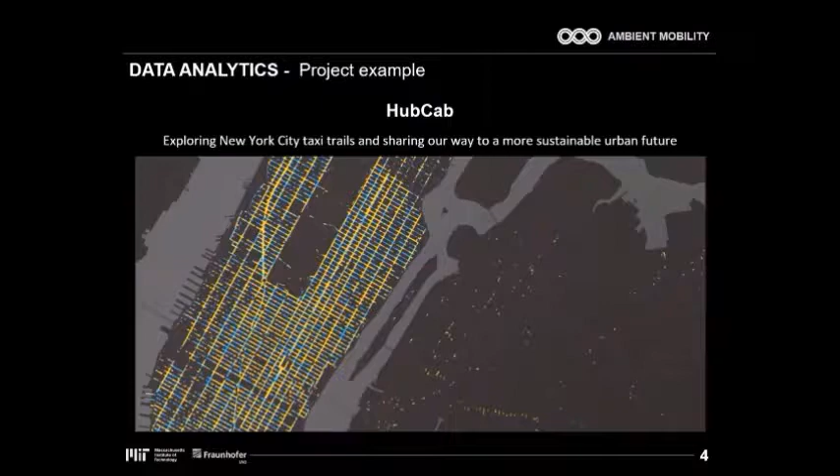What you can see here in yellow and blue are all the pickups and drop-offs in New York City by taxis, so by cabs, in yellow cabs in New York City. And as you can see, there are quite many of those.

These pickups and drop-offs are so dense that we had the idea to check what happens if not just one person is in each vehicle, but 2 share the same car. We just put some very practical boundaries around it: you do not want to lose more than 5 minutes, and you do not want to walk more than 500 meters. Then we checked what would be the potential, how many of those cabs could be shared.

And the percentage is quite stunning. Over 90% of cab rides can be shared just by pooling within an additional range of 5 minutes of travel time and 500 meters of walking.

If you do the math a little further, you can see that doing this, just putting not 1 but 2 persons in the same vehicle, can spare you 40%, even in practical terms. This is on real data, 100% of the cabs that is collected in New York. So you would only need 60% of the cabs.

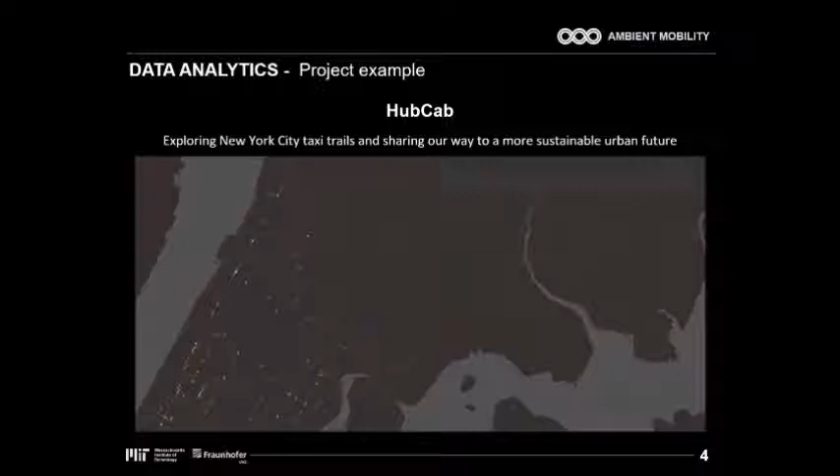Just astonishing numbers, which you can see if you go through some of the data. A more practical example, something that has happened in the real world: we have been part of the introduction of Car2Go in Stuttgart. It's the first, or still the biggest, electric vehicle free floating car sharing in the world. It started with about 500 electric smarts, and there we got a little more practical insights into what it is like to do free floating car sharing.

Free floating car sharing means that cars are not station bound. You can leave them anywhere in the operation zone, and pick them up and drop them off anywhere in the zone, so you don't have to bring them back to any stations.

What we learned throughout this process is that there's a lot of things evolving to be learned. For example, the vehicles move into the city in the morning and out of the city in the evening. So if you want to get a Car2Go in the evening in Stuttgart Center, for example, where I live, it's kind of hard because people drag them out to the outskirts of the city center when they go home in the evening.

We've also done some experimentation on how to access these vehicles. There have been Bluetooth tests with mobile phones. The whole system started with RFID cards, so you had your own card that you put in your pocket and just accessed it with a code. Currently, how Car2Go works is with an app, which is GPS based, and then you get access with your code. That's very convenient and has improved the system quite a lot.

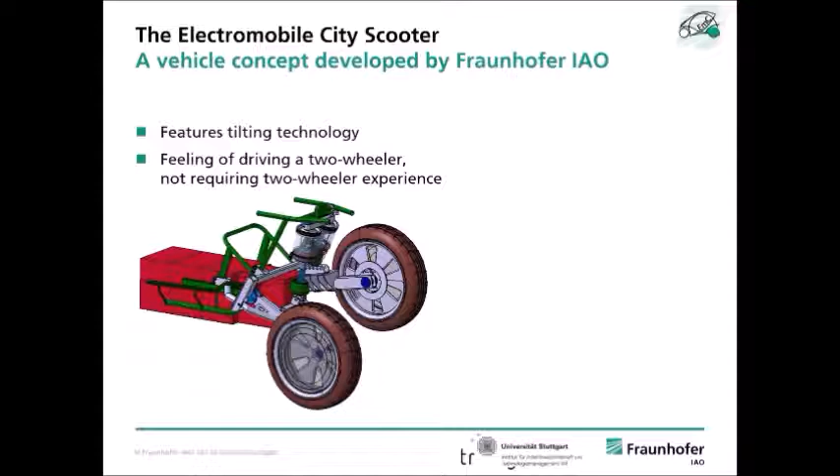If you're thinking as a city or as a company about introducing your own shared system when it comes to vehicle sharing, one of the dogmas that's been true for a long time, that you only use vehicles that are already there, is not true anymore. It's kind of simple, and there are lots of small companies that create new vehicle types.

This is one we built ourselves, the electromobile city scooter. It's a normal electric scooter, except we changed the back axis into a two-wheel axis, so that you can stand at any time and not fall over.

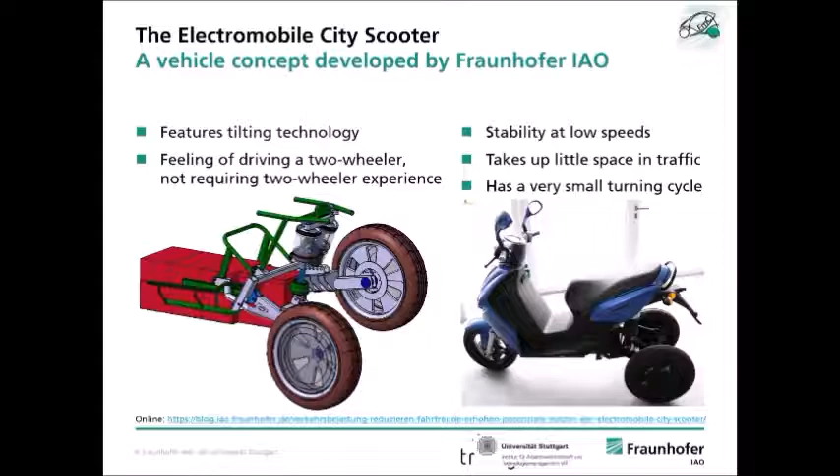So it's not only the big German, French, or Asian OEMs that provide vehicles for car sharing anymore. For example, Deutsche Post, the German National Post Service, is building their own electrical car sharing fleet, which they built specifically for their purpose, to deliver mail and packages. So they are actually one of the biggest electric car manufacturers in the world now. It's due to this technological change that there's a lot of new possibilities in the market.

I'll now hop over to the next megatrend, which is autonomous driving, and I want to show you an example of what we are currently working on. Let me start with this.

The technology with autonomous driving is quite far, it's quite advanced. There are still lots of legal challenges, lots of challenges in how to organize the system, priorities, legal issues, also social issues, psychological issues. But the technology itself is really quite advanced. You can get semi-automated driving pretty much in every high-class vehicle. The Mercedes-Benz S-Class, the Tesla itself had something called the autopilot, which isn't fully autonomous driving, but is getting very close. So the technology isn't really the thing.

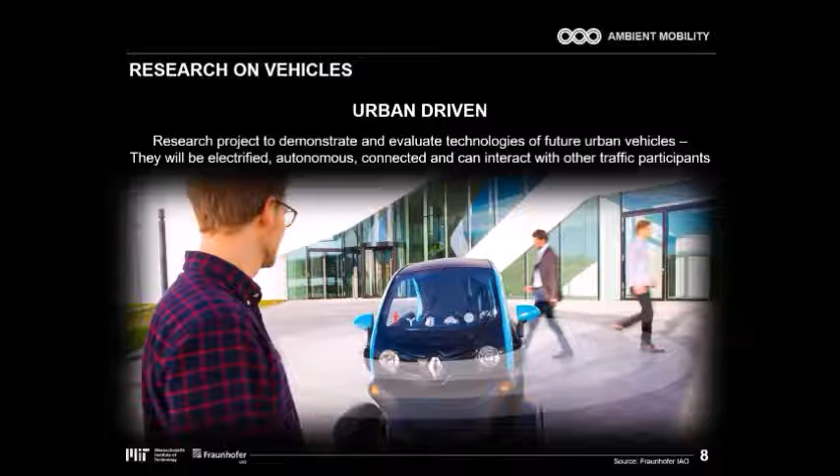But if you think of that system, it will be for quite a long time a mixed system of people driving and autonomous vehicles driving. There is this issue of vehicles communicating with persons. That's something we are experimenting with currently in a project called Urban Driven, so that people can communicate with the cars and the other way around, in an area that hasn't been researched too much in the meantime.

The funny part about this is that all the data this vehicle needs to communicate with persons, or also to recognize persons, the sensors needed are actually nothing more than an Xbox Kinect. The gaming console Xbox offers an array of sensors built into a tiny little thing called Kinect, and it's only €100, $100 actually. This data that the sensor gathers is actually enough to recognize people and to do the funny stuff of communicating.

Fun part also when it comes to autonomous vehicles is that when you do not spend the time in the vehicle driving anymore, you have lots more opportunities for what you could do and what you maybe would like to do. So we did a survey in 3 different countries: the USA, Germany, and Japan, to find out what people want to do when they are driving.

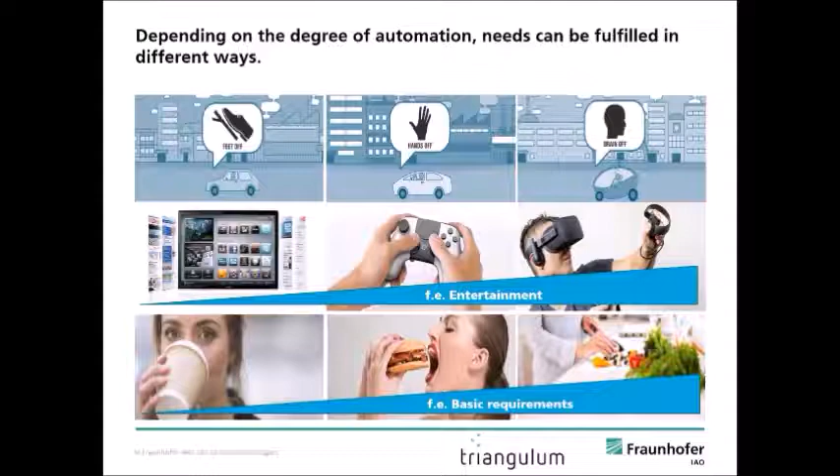So it's actually a congestion assistant. And then there's the third part: feet off, hands off, and then there is actually the brain off, where the car does everything by itself. So those are the 3 levels of automation we are talking about, and we checked which requirements, or what needs and services people want to have.

And I would like to ask you which one you think is most important for this sector. We of course hope that also for the business models behind it, that everyone who drives to work and drives home wants to be productive, wants to work. That's where we could create business models around employees paying for these services, but that's by far not true.

It's actually one of the most unimportant ones. By far the most important thing for people, what they would do when they wouldn't need to drive, is communicate—calling people, having Skype chats, just communicating, maybe inside the car—but working is really, really not important. The second most important one is entertainment, so if people have time in the car, they would love to be watching movies, playing video games. And that's true for all 3 countries we looked at: Japan, USA, and Germany.

Some more key findings of this survey. We asked if people are willing to pay for these additional services in cars, and one of the major things we learned is that 75% of users are willing to pay for these services. If you put this into an order of which nationalities would be willing to pay most, people from the United States are willing to pay the most, then people from Japan, but Germans are less used to, or less willing to pay in this area.

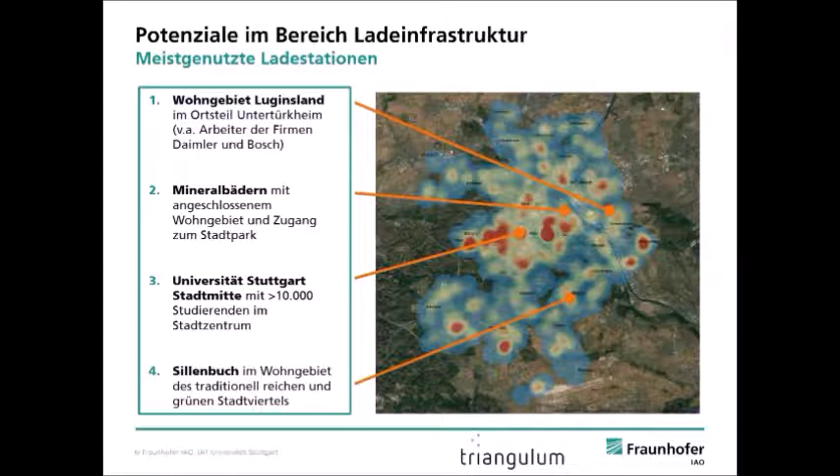When it comes to electric vehicles, charging on the car side is solved for quite a while, but the problems now occur a lot in the electricity network. In the area of Baden-Württemberg in the south, which is a more developed place in the world, there was a place where we couldn't place 3 charging stations next to each other because the medium voltage grid—not the local grid, but the medium voltage grid—could not offer the power needed. This is why there are concepts of smart grids, managing the peak demand a little better.

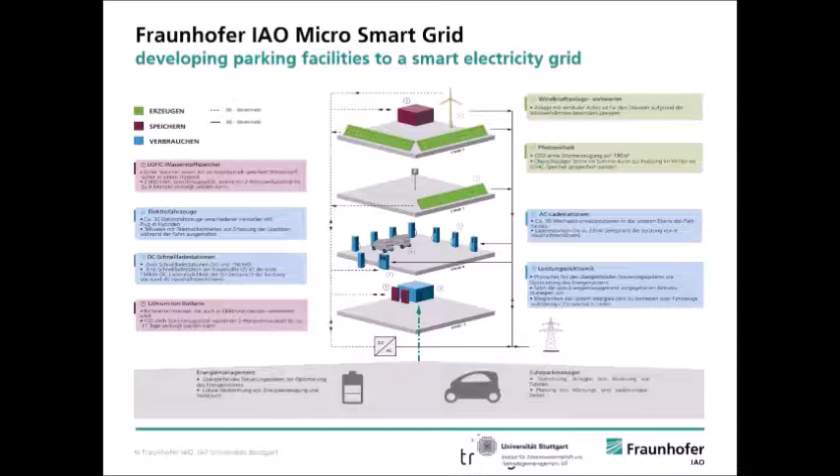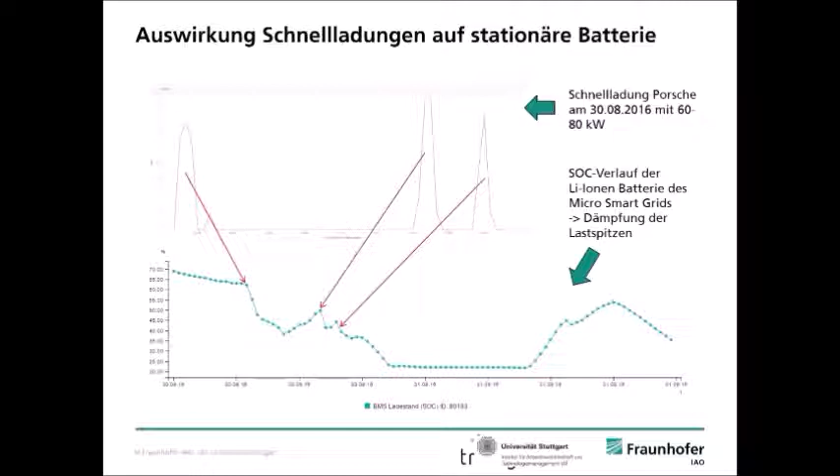If you understand that there are tests currently with 350 kilowatt vehicles, about 3 to 4 times this, you can imagine what that means to local grids. Also, when it comes to money, we pay 20% extra on our bill, I cannot tell you the exact amount, but it's quite substantial, just because of these peaks. In Germany, you have two parts to your energy bill: one is the kilowatt hour based one, and one is the power based, kilowatt based one.

Just a quick look into one of our ideas on how to solve this problem in a scattered way. This charge lounge also has a battery inside, so it needs a very, very low connection to the grid, and can still serve many different cars via battery in a very high power system.

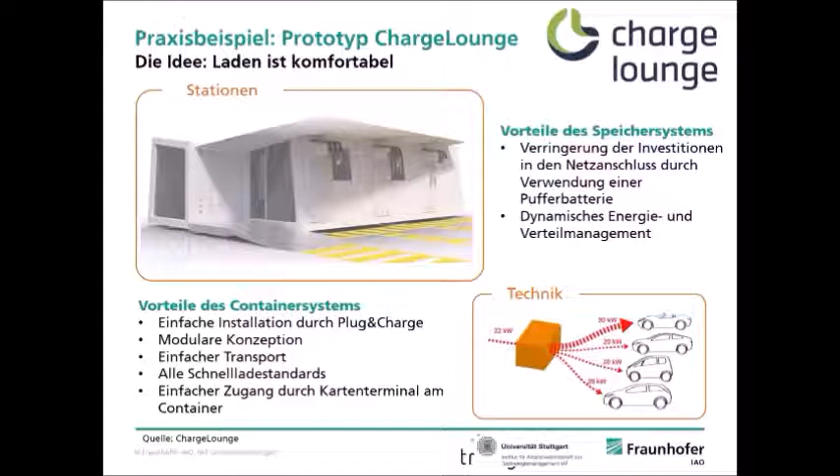As part of our cooperation in Triangulum, this one will very soon be in Eindhoven in Strijp-S with our partner Volker Wessels, who will then operate it over the next years. It will be presented at the Dutch Design event next year.

The whole concept is very flexible because when you're charging, you still have to wait a while. So we had one which we put at IKEA, and they have a sustainable living exhibition right behind these chargers, so that people, while charging, even outside of opening hours, can walk in and have a look at what IKEA does in the area of sustainable living.

The last part is connected mobility, which I'd like to talk about. The first thing that always comes to mind is one integrated card of services for public transport. I've been part of a project called the Stuttgart Service Card, very similar to what we know from other places, like the Octopus card in Hong Kong or London, an integrated travel card. This one was intended to do the same.

The interesting part is that technically it's really simple to integrate all the services, so to have a card that opens the car to use public transport, and also maybe for public services. The real problem, and why this system didn't really use all its potential, was that the stakeholders couldn't agree on terms for who owns which data and who is allowed to use which data. This is the main problem with these kinds of integrated systems: when you have a wide range of stakeholders, especially private ones included as well, it's really hard to distribute rights to the data.

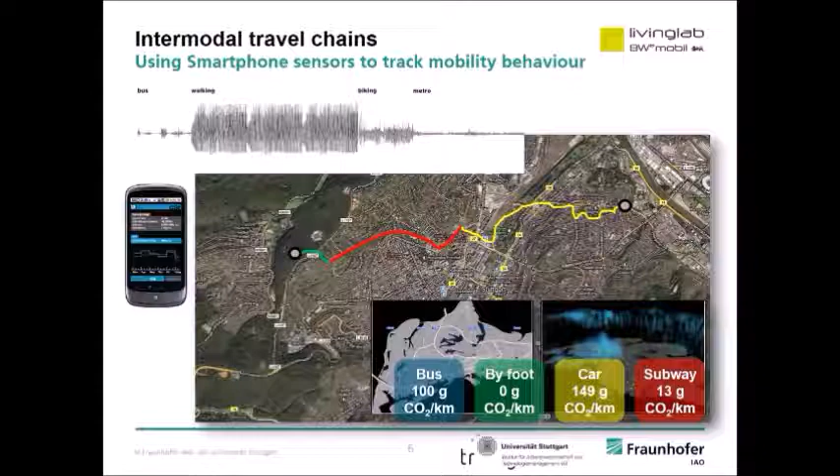So we tried to measure this, using sensors to measure the inconvenience with people, heart rates and how quickly they are moving, to receive a little more insight and maybe give people more information on how they are moving and how much CO2 they are emitting. So not only can you choose the fastest route, but you can choose the most convenient one, or the one that is most CO2 neutral, the most climate friendly.

So, a very quick look - that's my last point - into individual or connected mobility. We do not know too much about mobility. We have very, very few information on when, why, and how people are moving when it comes to the whole mobility system.

The information currently used most is survey data, a huge scale, very expensive service. We've done a comparison of which data are most suitable to do what, comparing 5 different kinds: surveys as the most used currently, automated traffic counts, so everything collected with sensors, including CCTV, and floating car data, data created with GPS accuracy inside vehicles - that can be cars, buses, or other public transport modes.

Then mobile GPS data, which is the stuff that, for example, Google and Waze collect - so GPS accurate data from your mobile phone - and mobile network data, the data collected in the mobile network. Whenever you log into a new cell, there's an event created in the backend of the cell phone provider, giving you the location of a person. It's not relatable to a specific individual, but it can give you information on how people travel. We used that data and checked how accurate it is and whether it can be used.

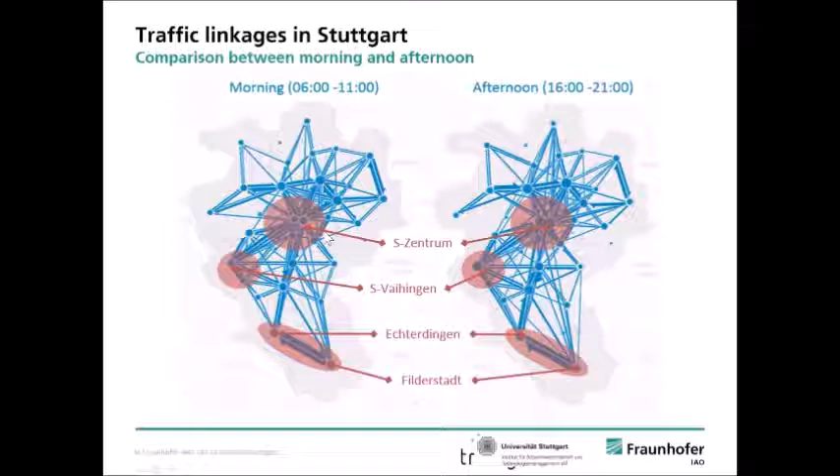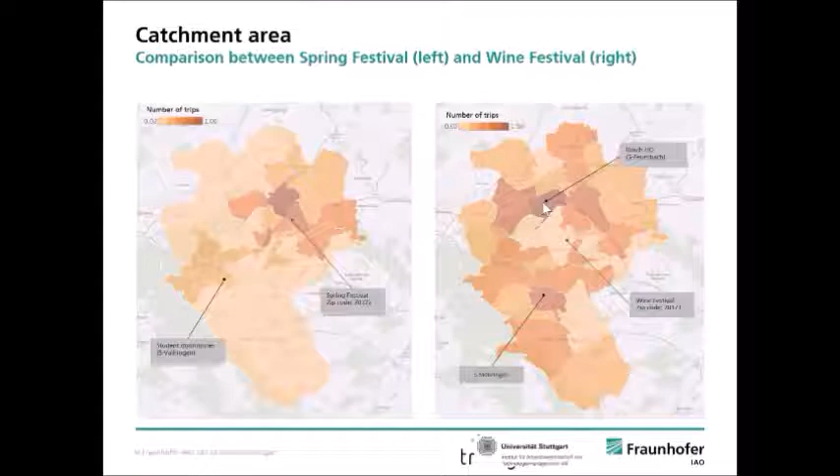There's another peak here in the southern part, where the student dormitories in Stuttgart are - also a huge flow into this festival. It looks completely different for the wine festival, which is a bit pricey. In the south are the areas where lawyers and doctors live, the more affluent area. We couldn't really understand this peak up here at first, but it's actually the Bosch headquarters - after they finish work, they walk down in a whole bunch into this wine festival to have wine together.

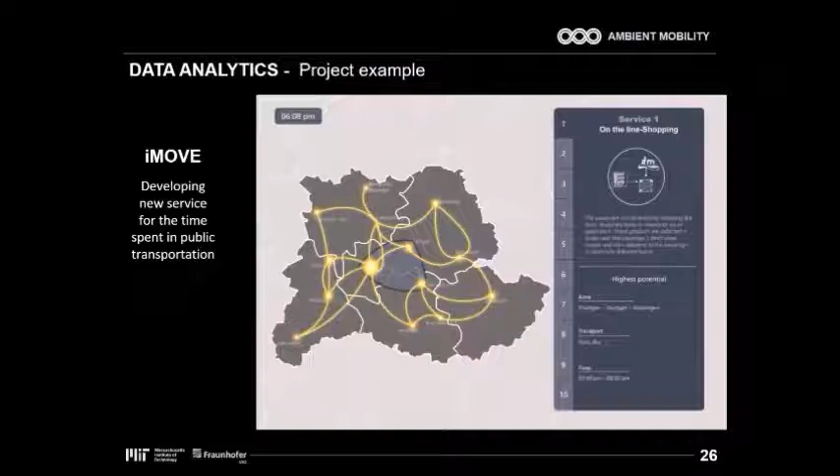I'll skip this one. With all this data, what you can actually do is also define new services and see their potential. We've done this in a different project called iMove that provides tailored services to people moving somewhere, using a completely different data set. But using this kind of data can also help define services for a customer group. This gives impulses for future scientific work.

As I've talked for quite a while, I don't want to go through them. It's just to show you that there is still lots of work to be done when it comes to new mobility modes and new innovations in mobility. So whoever wants to join us at any time with answers to any of these questions, we're really happy to do this.

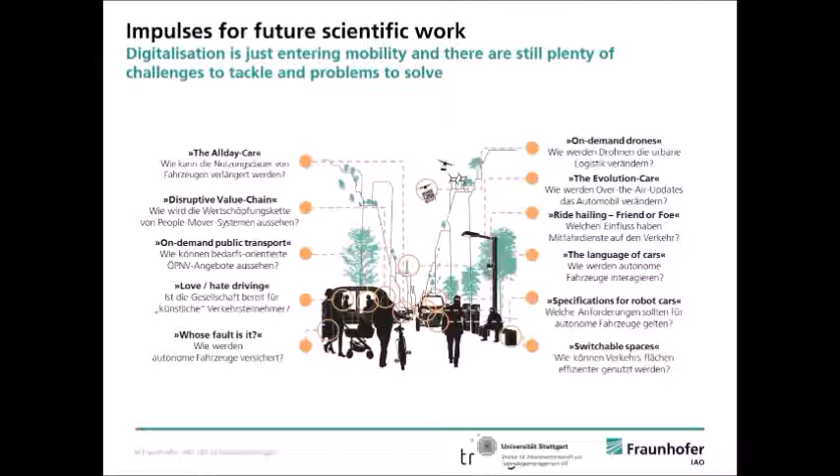And this would be the end of my presentation, with the only addition that the end of the car has been announced by many people. We don't think so. It will still be an important mode of transport for the next years.

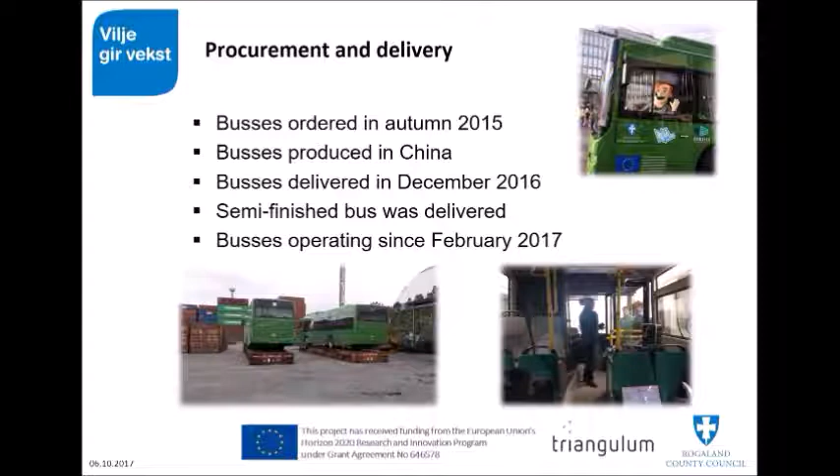The buses were presented to the public in 2017, since we had this nice design competition and wanted the citizens to be involved in this project. We had an arrangement, and I think we gave away 2,000 muffins. That shows that quite a lot of people came and were interested in the buses, so that was very nice. The buses have been running since February this year.

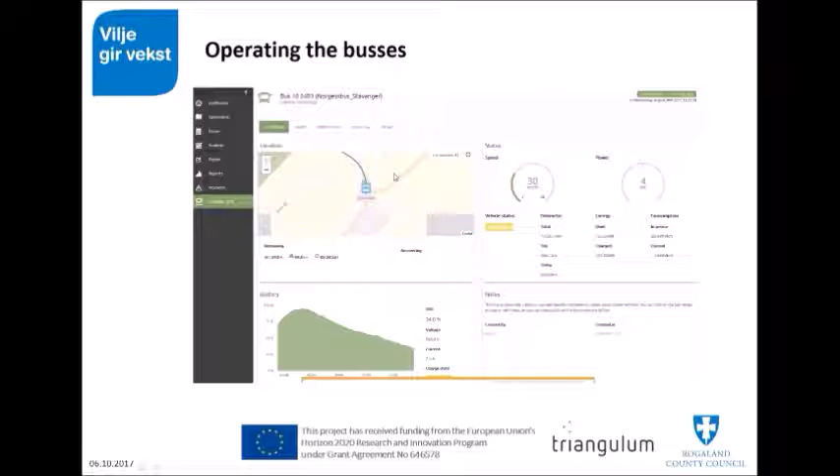We also installed a monitoring system in the buses where you can see in real time a lot of things: where is the bus, how fast is it driving currently, how much energy is it using, how much energy is left in the battery, and so on. That, of course, is very good, because then we can produce nice charts.

The challenges with the buses: we have something we call Rekkeviddeangst, which is basically the fact that the bus drivers are in a way afraid that the battery will not last. They don't really trust the instruments in the dashboard regarding the remaining energy. They have to get used to that.

So a bit of explanation - I'll jump to this one first. The Oxford Road corridor, some of you may not know, is our smart city district. It's a 2-kilometre route that runs from the city centre in Manchester down to the south, and it's been one of Europe's busiest bus routes. It's quite a challenging artery into the city.

We have deregulated buses, so that means we don't have as much control in the city as we'd like. As a result, we've got lots of buses going up and down there, cars going up and down there, 2 major universities, hospitals, a science park - something like 70,000 staff working in those areas or studying. So it's a lot of people in a not very big space.

One of the initiatives that the city has taken with our transport authority is to actually close that road and redirect traffic onto an adjacent road. That means from just about last month, we've prohibited cars going down that route between the hours of 6 AM and 9 PM, unless it's an emergency vehicle or you've got special permission and a vehicle registered to use that route. So all cars off there, just buses and taxis.

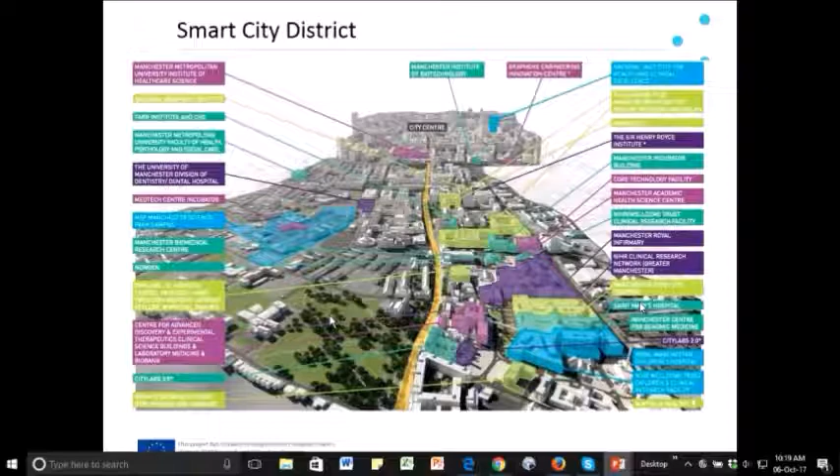As part of the project, we have the University of Manchester, referred to here as UoM, and we've got MMU providing 2 electric cars up to their fleet. Both of those are partners in the Triangulum project, and they've used funding from Triangulum to buy some vehicles for their own use.

MMU go out to visit students, to promote their services and the opportunities that the universities provide to school students. What they did was get 2 e-cars and put them into their carpool. The aim was to say to staff: you could come to the office, come to the university on public transport or by bicycle - you don't need to bring your car because we'll provide you with a car whilst you're here.

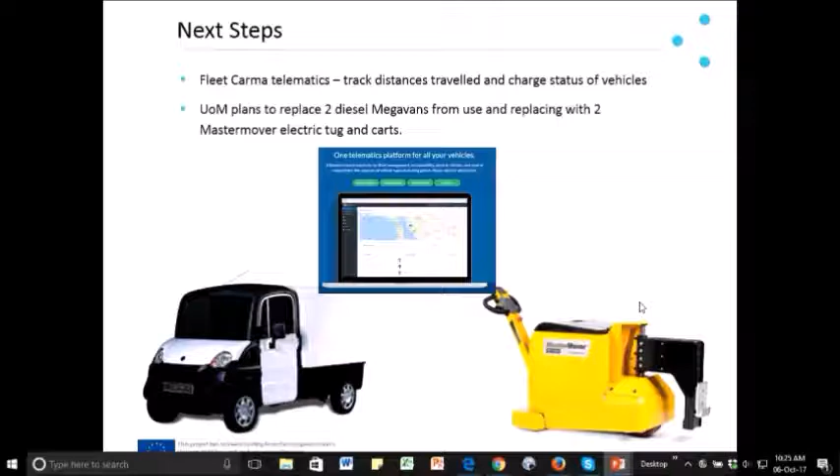One of the things happening next week in Manchester that we're trying to tie Triangulum back to is Eurocar doing an electric vehicle roadshow. It gives us a sense that there is some momentum building. We've also been trying to do work with our own city fleet manager, and hopefully he'll be attending this event so we can talk to him more about the opportunities that electric vehicles offer for the City of Manchester as well as the universities.

So that's everything on cars. What I'm going to move on to now is just talking about our e-cargo bike opportunities that we've created.

So what we did as part of Triangulum was talk to Manchester Bike Hire. One of their operations is last mile delivery. They have their professional cycle logistics, and they deliver parcels on behalf of DHL around Manchester. So we brokered a deal with them where we would...